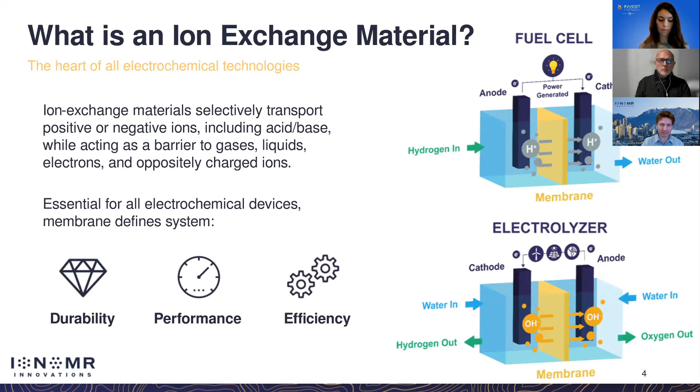On these materials, the most advanced hydrogen production systems, fuel cells, and CO2-to-value systems can be built. We worked on these materials for more than a decade before commercialization, starting late 2017. We have breakthroughs to replace the fundamental material set in PEM fuel cells and PEM electrolyzers, as well as unlock alkaline systems for advanced electrolysis that we firmly believe will be the most cost-effective green hydrogen possible.

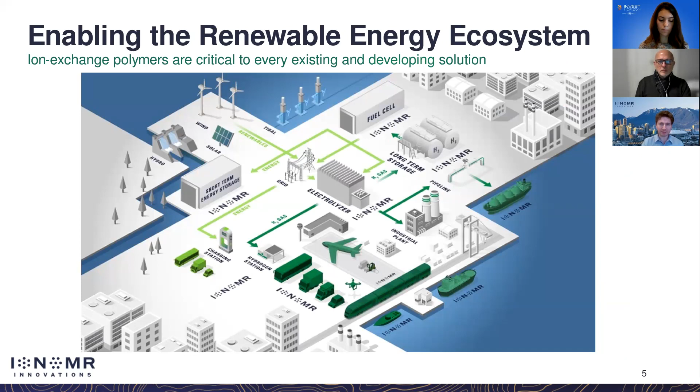We have breakthroughs for industry, and on top of it we can replace toxic fluorinated chemistry. We're focused on these technologies being the center of the hydrogen revolution and the key market we want to chase. These are platform technologies for ion exchange materials. At the heart of our innovation, we engineered out the groups susceptible to degradation and achieved the highest performing materials on both sides ever shown in commercial materials. In green hydrogen, our Aemion material set is a game changer, unlocking AEM electrolysis.

AEM electrolysis has recently had targets set by the Clean Hydrogen Joint Undertaking, and at the core of it, this enables a greater than 40% reduction in CapEx cost for a technology that can best match the intermittent renewables coming onto the grid. So it's a 2-for-1 solution that combines the benefits of both traditional alkaline and PEM systems.

Traditional alkaline has low cost components, and that's about its only benefit. These are large 40-ton systems that exist in giant warehouses, a technology over 100 years old, pioneered by Norsk Hydro, now Nel. PEM electrolysis has been around since the 70s or 80s, used in the Gemini space program, but hasn't really been commercial for that long. It balances intermittent renewables well, but at an extreme cost of using platinum and iridium, not just as catalyst but as coatings — not a tenable technology. So we combine the benefits of these two, and we have stable materials.

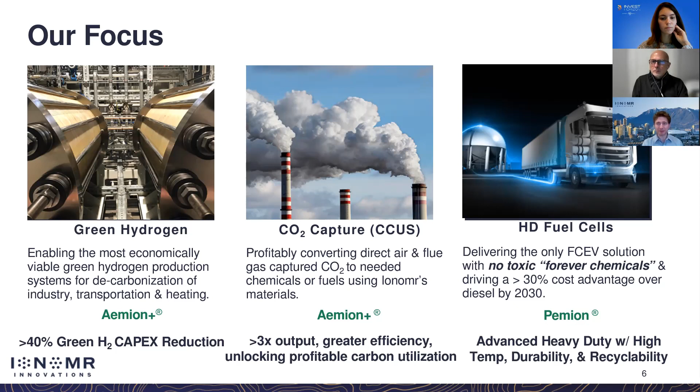In CO2 capture, we're a stable platform, the first for this system, enabling a 3x improvement versus incumbent materials. In fuel cells, we can replace Nafion with the only REACH-happy materials for the future of this technology. This is a large and growing market, over $1 billion today, growing rapidly on the basis of these technologies.

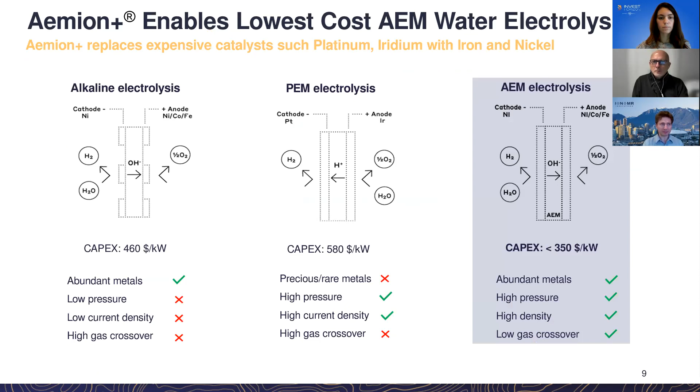These are the targets I just referenced. One important thing that's overlooked is that Nafion, the basis of many electrochemical technologies, is also very toxic — a perfluorinated alkyl substance currently under an essential exemption, which won't last long term. Many large companies are turning to us as the only viable materials for directly replacing Nafion in electrochemical devices, an effort largely driven by the European Commission, with agencies like the EPA following in their footsteps.

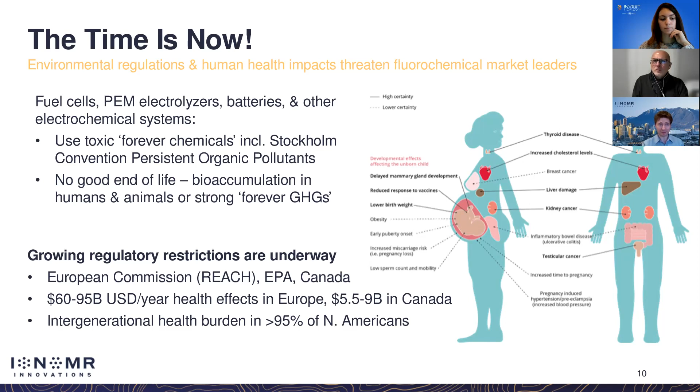Ionomr has the only team in the AEM space that can scale. We're a merger of the team that brought consumer Wi-Fi to the world and polymer experts with deep experience in very difficult polymer chemistry technologies. We're scaling today — we've produced hundreds of kilograms of polymers, enough for thousands of square meters, supporting not just large pilots but full installations and product lines.

We're implementing ISO and bringing up a facility in Rochester, New York. We're looking to expand into Europe and North Asia in the coming year, and would have done so already without travel restrictions. We're in the process of closing a Series A for $15 million US, and there's enough interest on the table that we're looking at an A+ round in the first half of this coming year.

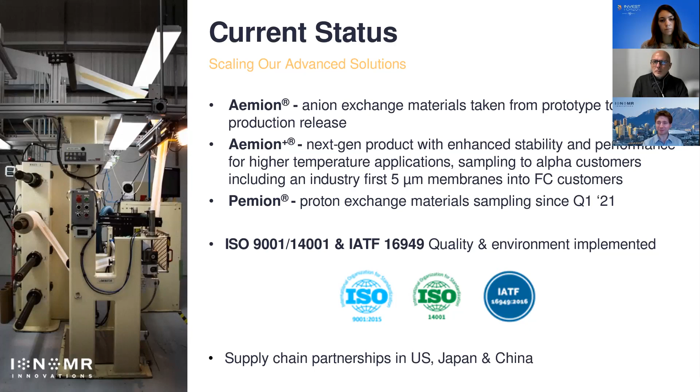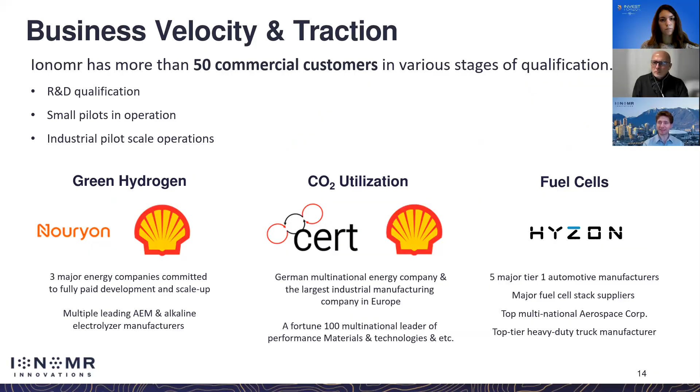So very interested if this fits your targets. We've been recognized for both of our materials platforms by some of the top awards in the world, and have over 50 commercial customers, including large corporates, in all of these market verticals. So that is the high level of Ionomr, and thank you for your time and attention.

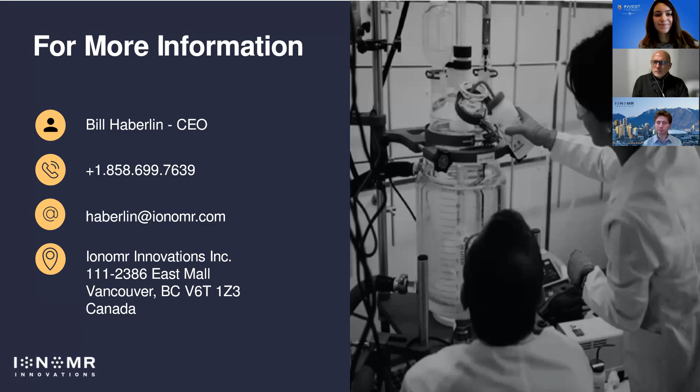Okay, do we have questions? Anyone? Or feedback? Maybe one question from myself. Benjamin, thank you very much for the presentation. Very interesting to hear. Can you elaborate a bit more on your go-to-market strategy, especially on how do you convince customers to buy such large projects, and how do they buy your technology?

We're a pure play material supplier. So many of our competitors in the AEM space are looking at integrating vertically, but we believe that making materials is difficult enough. We also have an asset light strategy, so we don't believe in doing anything in-house that we can do more cost effectively out of house. We partner with large chemical suppliers to make our polymers, as well as partner with film coaters to make our films. We do have pilot capacities to what would be considered large scale in-house, so 100-liter reactors, and we have a pilot line that can produce hundreds of square meters a day, but it's not enough. We need partners, and so we truly do have an asset light strategy.

Our goal with the Aemion and Aemion+ is to get beyond break even and to an inflection point in 2024, 2025, where we're pulling in more than 50 million per year at a good gross margin, that we hit break even and scale from there. Yeah, so asset light in a chemical manufacturing sense is about that.

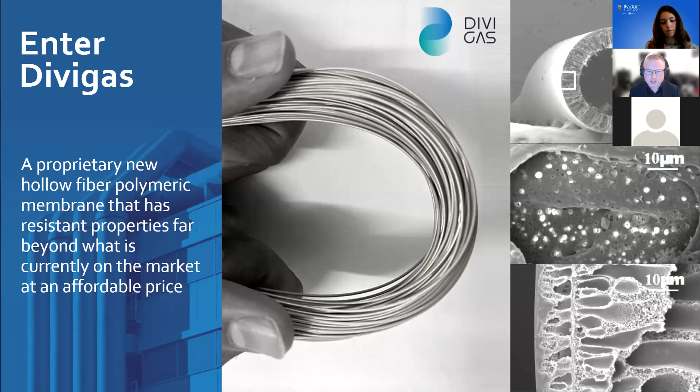DiviGas has developed a proprietary membrane that is able to selectively capture this otherwise lost hydrogen from these harsh gas streams. Strands of these polymer fibers are bundled together into a stainless steel module, and when in use, hydrogen passes through the membrane while all of the other gases are left behind.

A key advantage of our technology is that, unlike other membrane technologies, ours is resistant to the high temperatures and aggressive contaminants that degrade these membranes. Existing processes often require several pre-treatment stages and cooling to low temperatures before they can be used. This cooling, however, causes a secondary issue: at low temperature, hydrocarbons in the stream can condense on the membrane surface or within the adsorbent, causing fouling and low performance. DiviGas's technology operates at much higher temperatures, preventing this issue.

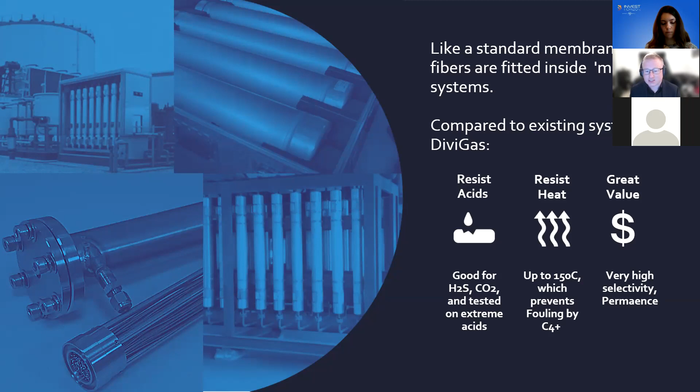Finally, DiviGas's membrane is also highly selective for hydrogen over other gases, including water and CO2. In certain conditions, it can produce hydrogen at as high as 99.95% purity at good flow rates.

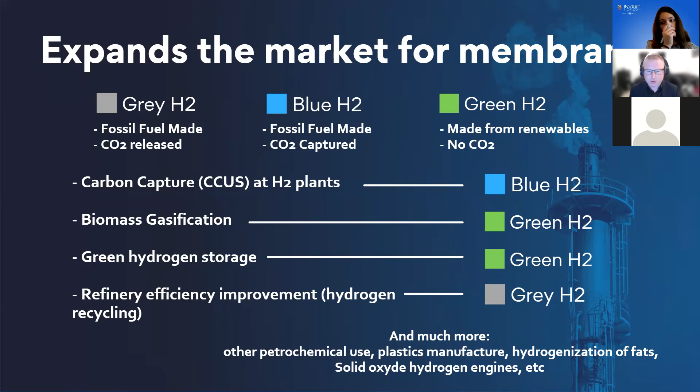In addition to applications in refinery recovery of hydrogen, this technology is competitive in a number of other processes for the production and storage of blue and green hydrogen. Examples we have looked at include carbon capture within hydrogen plants, production of hydrogen from biomass gasification, storage, and then subsequent recovery of green hydrogen, and several others.

Worldwide, the demand for hydrogen is expected to grow rapidly over the next 30 years. While considerable focus is on the production of blue and green hydrogen from renewable sources, there is a considerable challenge involved with transitioning the existing grey hydrogen value chain. Our technology targets this immediate need for decarbonizing grey hydrogen at scale and could help create a large supply chain of blue hydrogen in the future.

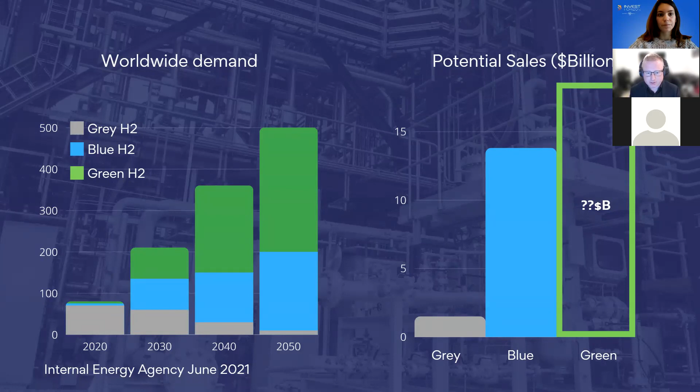DiviGas has already received significant interest from other clients. Many of these clients process gas streams that contain more than $700,000 worth of gas in process, but it is currently often being flared due to the difficulty or cost associated with processing and recovering that gas stream. It's simply cheaper to burn more gas. Our technology provides a competitive ROI for installing and recycling hydrogen from these gas streams.

A key benefit of our technology is the significant quantity of carbon emissions prevented by recovering this hydrogen. For every kilogram of waste hydrogen recovered, 10 times that amount of CO2 is not released due to higher plant efficiencies. While it doesn't solve the issue, this is a significant step forward and can be implemented rapidly. The barrier facing other technologies doing this at the moment is the lack of separation performance.

Our technology outcompetes many other membrane manufacturers on several key criteria. In terms of cost, it is significantly lower than other emergent materials and startups in this space, as well as being more robust than membrane technology supplied by our main competitors.

The polymers used are based on research by Dr. Ali Naderi, CTO and co-founder, who has more than 10 years of experience developing specialty polymer membranes. We're currently patenting our wholly owned IP. However, crucially, our polymer cannot be reverse engineered from the final product, giving us some level of protection immediately.

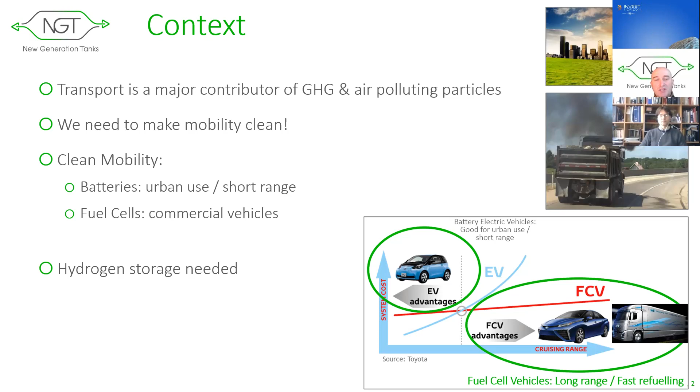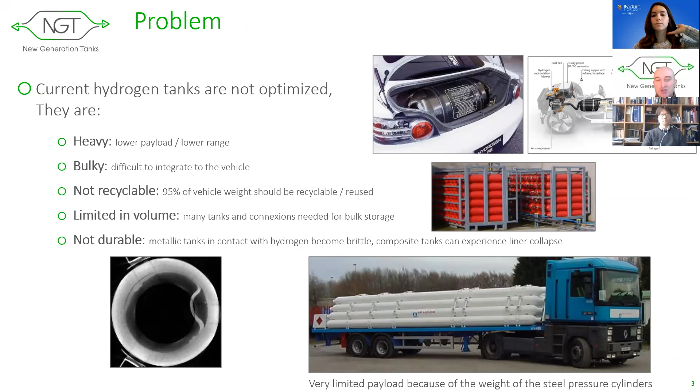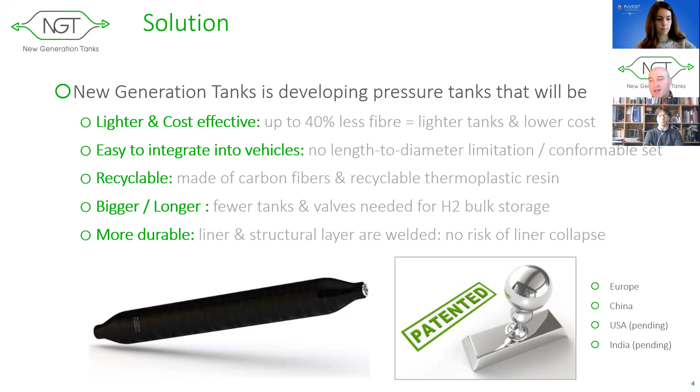The problem is that existing pressure tanks are not optimized. They are heavy, bulky, not recyclable, limited in volume, and may experience durability issues. So NGT is developing a revolutionary carbon fiber pressure tank based on a completely different design, another material and another process, allowing us to make tanks that will be lighter and easier to integrate into vehicles. They are recyclable and can be made longer with no more durability issues. The technology is patented in Europe and China, and patent pending in the USA and India.

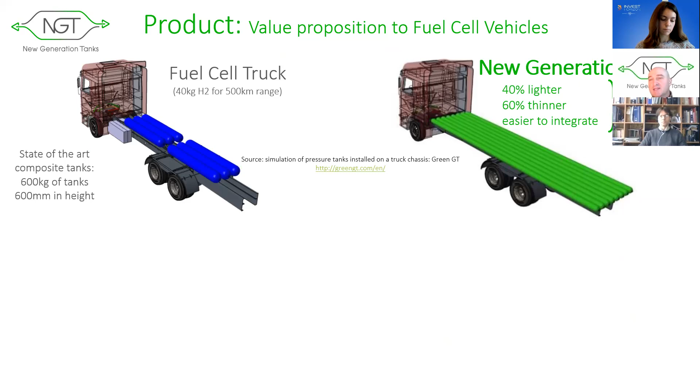Comparing how conventional carbon fiber pressure tanks would be integrated onto a fuel cell truck chassis on the left, and the NGT solution on the right. The NGT solution is lighter, more compact, and easier to integrate onto the chassis. It offers more space, more payload, and a longer range to the vehicle.

And if we look at a light vehicle, like a passenger car or a van, a set of NGT cylinders can be easily integrated into the floor, matching the concept of a conformable pressure tank. These benefits in the end contribute to the reduction of the cost of ownership of fuel cell vehicles.

The market today for hydrogen pressure tanks is fairly small, but it's expected to be a multi-billion market by 2030, based on the expected number of fuel cell cars, trucks, and buses. And 2030 will just be the beginning of the growth of this market. So it's a huge market potential.

The technology today is at TRL4, with some ongoing work to have this TRL4 validated in the next 2 or 3 months. The plan is to complete the development phase by 2024 and then go to industrialization.

And to support this technology roadmap, NGT offers investment opportunities: a short-term investment opportunity of 250K to support the work of TRL5 to be validated by mid-2023, and then a medium-term investment opportunity of 1.2 million to support the validation of TRL6 by late 2024. After that, there will be a longer investment opportunity to support the industrialization and growth phase of NGT.

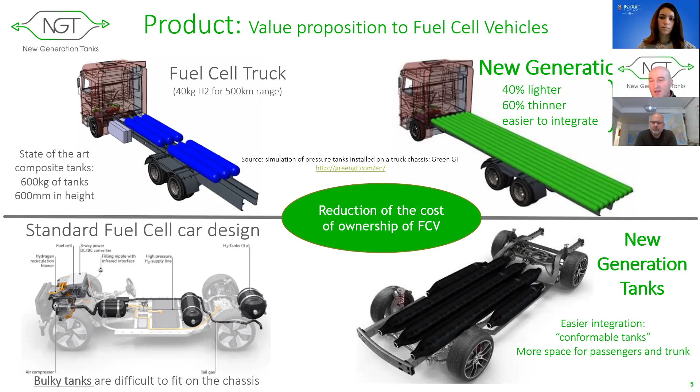Okay, thank you. May I ask, how far are you in your prototyping? Do you already have some cars driving on this type of tanks? No, no car powered with these tanks already. The proof of concept has been validated thanks to experimental testing, burst tests actually made on prototypes.

And there's also a big work of simulation that has been done. Today we are working on the improvement of the performance of the prototype made so far, and also on the selection of the right polymer. This is an essential parameter in the development of the technology. By February, we'll have selected the right polymer after a big testing program to carry on the development.

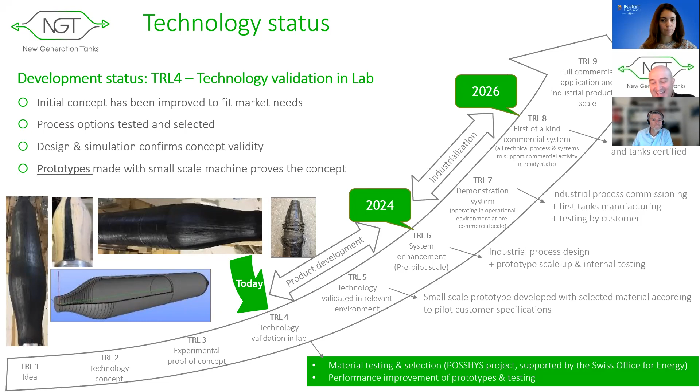To make these thermoplastic composite pressure tanks, NGT needs an intermediate product: carbon fiber tape pre-impregnated with thermoplastic polymer. We are developing this material in-house because we need it for the pressure tank, but that's also an intermediate product that can be sold on the free market in the short term to generate short-term sales.

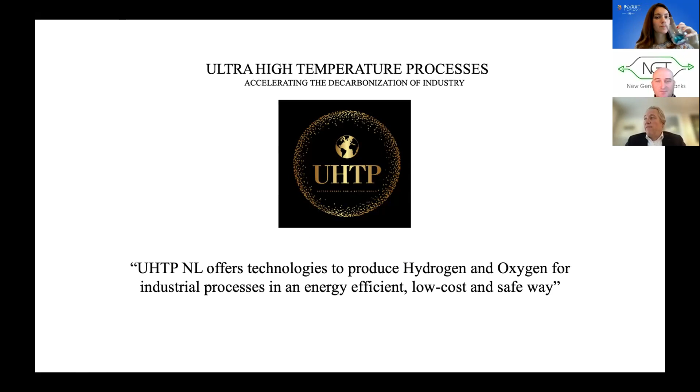To change from hydrocarbons to only hydrogen as an energy source is a very hot topic these days. Hydrogen is the way to decarbonize the world and mainly the industry. But how can we produce enough hydrogen in a green, energy efficient and safe way? We think we have found a different solution to produce pure hydrogen and pure oxygen with the same installation.

We have validated our technique. We have partners and customers ready and a clear development strategy. Just to give you some idea, 1 kilo of hydrogen contains approximately 35 kilowatt hours. It takes approximately 50 kilowatt hours to produce 1 kilo of hydrogen. The difference is more or less wasted in heat losses.

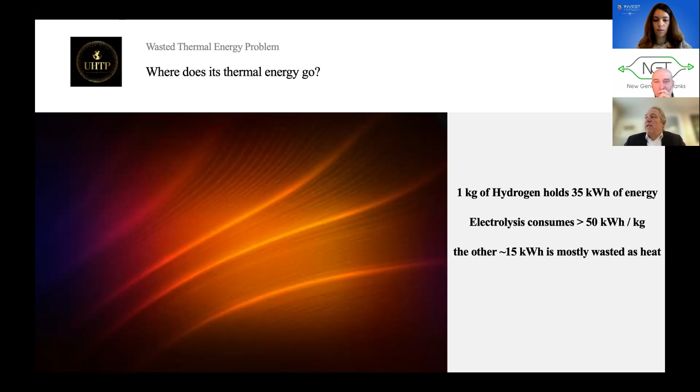The technology we introduced to you is called thermolysis. If you heat water to 2250 degrees Celsius, the water molecule breaks into hydrogen and oxygen. We call it our water splitter. The system needs water, electricity, and can use any waste heat coming from existing waste heat sources. The hot gases, hydrogen and oxygen, are cooled with ceramic heat exchangers to preheat ingoing water.

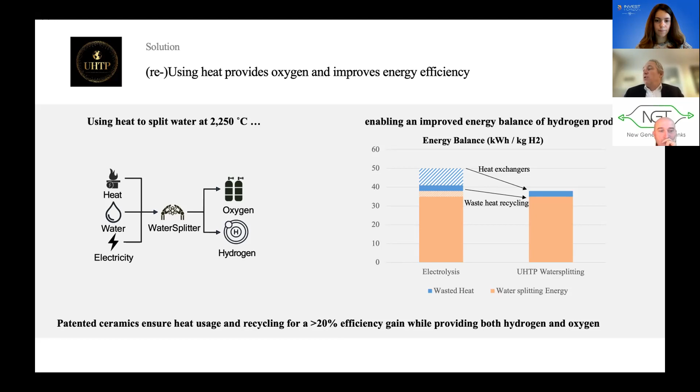To reduce energy cost even more, the system can use available waste heat coming from other energy sources. Any steam temperature above 105 degrees Celsius is welcome in order to reduce electricity usage. Our electrical energy consumption is approximately 20% less compared to other electrolyzer technologies.

The water splitting at very high temperature is yet unexplored but known physics. To investigate this idea, the founders of the water splitting technology started around the year 2000. Several proof of concepts were built in laboratories long before the topic of changing energy demand to hydrogen was on the agenda. Two years ago, we came in contact with the founder of this technology and started our goal and project to bring this technology to the market.

As you can see, we have compared our technology with steam methane reforming and electrolyzers. All green hydrogen produced starts with green electrical power. The reactor is completely ceramic based, with 20% less OPEX and 20% less CAPEX. And because of the separation into pure hydrogen and pure oxygen, it's safe.

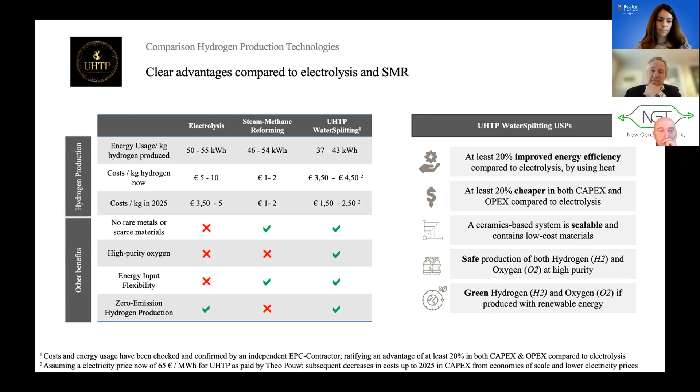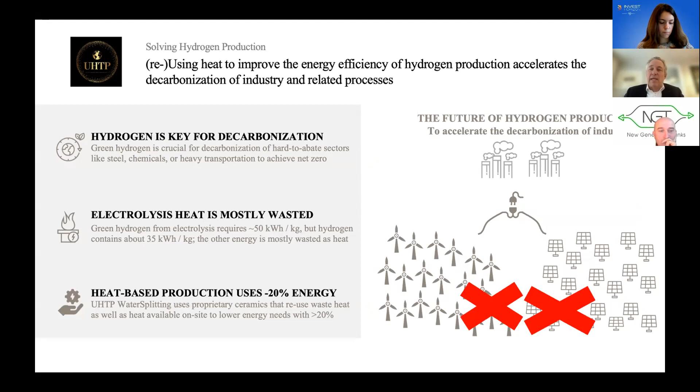We think we can be 20% less electrical power consuming compared to other technologies. Imagine, for the same output of hydrogen and pure oxygen, 20% less wind turbines or solar panels needed. Our first target markets are heavy-duty mobility users like the high-end transportation industry. The oxygen from the water splitter will replace normal combustion air with pure oxygen, for example in the oxy-combustion industry.

We have, and will continue, in-house ceramic filter production, with several patents on various ceramic parts, and more IP development during assembly of the water splitting system. Our strategy is direct sales of water splitters, and hydrogen/oxygen as a service can also be offered as part of our business strategy.

Our first goal is to build a pilot installation to split 18 kilos of water per hour. The output is 2 kilos of pure hydrogen and 16 kilos of pure oxygen. We have established contacts with HydroHub and Brainport in order to build our pilot. For this part, we are looking for 4.5 million euro.

Our second goal is to build our first commercial demonstrator. We have an interested customer who will use the hydrogen for transport purposes, and the oxygen will be used in their existing heavy combustion process to reduce NOx, CO2, and other flue gases. For this part, we are looking for 5 million euro.

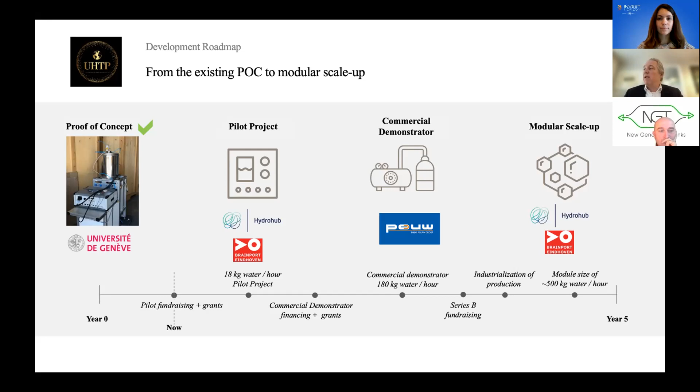We have spoken to many national and European grant supporters. Our story and goal is very appealing and fits very nicely into the current programs. We think we are able to raise at least 50% of our total financing with grants.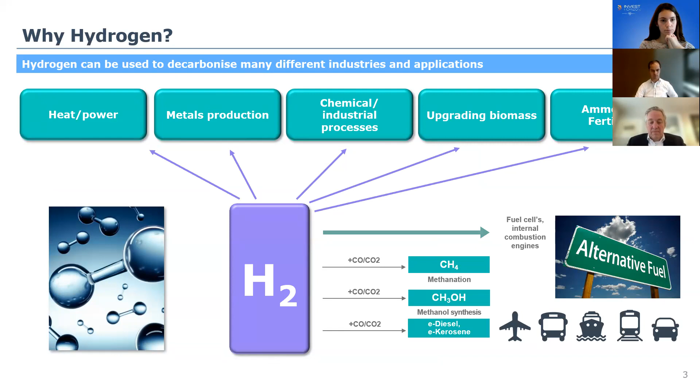So why hydrogen? Hydrogen is a building block of almost any chemical compound. It can be used to decarbonize many industries and applications such as metal refining, marine transportation, and power generation.

Our technology is a catalyst that helps us split methane into clean hydrogen and solid sustainable carbon with 10 times less energy, zero emissions, at an affordable price required by the industry. It is scalable, so production meets industrial requirements, and the process can be put close to the customers as well.

The catalyst is our own IP, with over 20 years of research behind our innovation. The catalyst is environmentally friendly, regenerated in a sustainable way, and also recycled after use. We are developing a catalyst family that enables us to make different kinds of carbon.

As a byproduct, we get very high quality clean carbon, which is used in several industries critical for the future of Europe - batteries, composite materials, activated carbon applications. We have already tested our carbon in batteries.

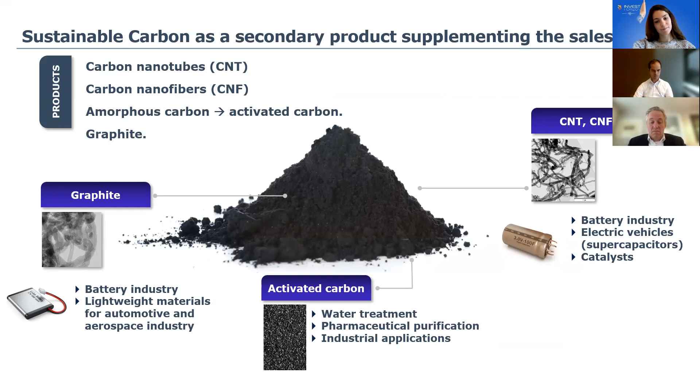These carbons are now imported from Asia. We produce them in Europe. Sustainable carbon as a secondary product is supplementing the sales.

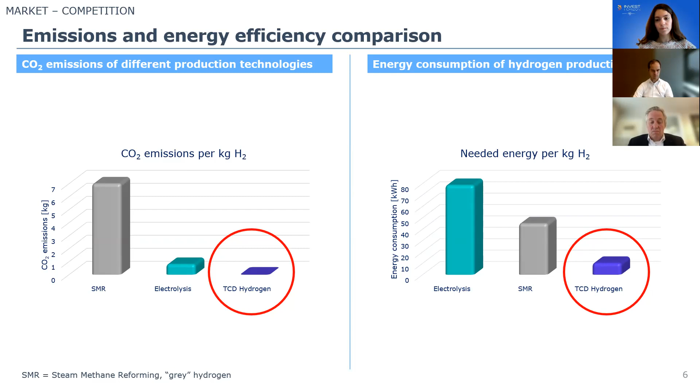Compared to other production technologies, Hycamite TCD has no CO2 emissions and requires less energy per produced hydrogen - only 10% of the energy compared to green hydrogen, i.e. electrolysis.

We have lab scale testing, but also a small scale pilot plant. The natural next step is to build an industrial scale demonstration site for piloting. Scaling up is done with strategic partners.

For this, we have already signed an agreement on the area reservation and delivery of natural gas. We have also signed an agreement with Sweco, a highly evaluated engineering company in the Nordics, about designing the plant. Now we are seeking financing for this site from public and private investors.

We need a proof of concept at industrial scale, so we are building this demonstration plant. We are raising 10 million euros in equity combined with plant financing for building the demo plant and for plant operations.

In order to scale up, we need to have a proven business model as well. We have discussed our business model together with our strategic customers. The proposed business model is based on direct sales of our main end products: high value added solid carbon and clean hydrogen. The sites will be located close to hydrogen customers to avoid unnecessary investments into infrastructure.

Long supply agreements will give security to asset investors financing the plants via SPVs. The sale of commodity carbon and possible combination with carbon emissions trading will be added as deemed possible. The sites will remain under our operations. This way, the business model can be truly scalable to enable quick internationalization.

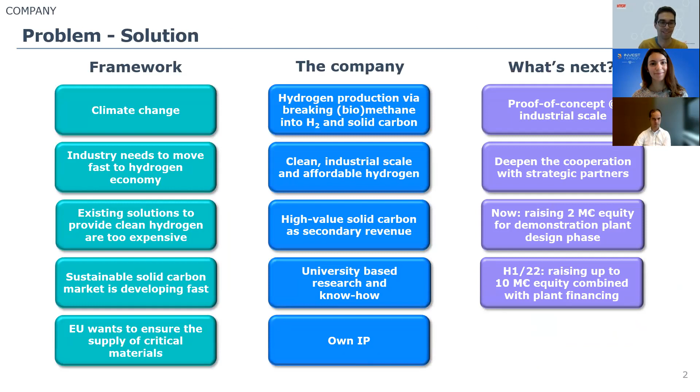But actually, most customers at the moment are happy with just raw hydrogen, a mixture of hydrogen and natural gas, in the initial applications—not looking for 99.999% purity. At our location in Kokkola, we have a couple of companies using hydrogen for cobalt refining who need high purity hydrogen, which we deliver to them. This is existing technology, not an issue. But all the other customers so far have been seeking only something between 20 to 50% hydrogen as a mixture with natural gas, meaning not even all the gas we produce would be used as such—they want to blend it with their natural gas.

Thank you so much, Matti. Hi Matti, thanks also from my side.

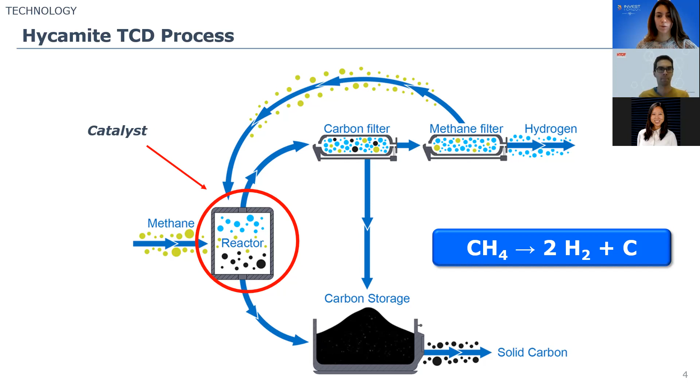Do we have any more questions for Matti? Then thank you Matti for your time and your presentation. Yes, I will ask you to stop sharing your screen. Thank you.